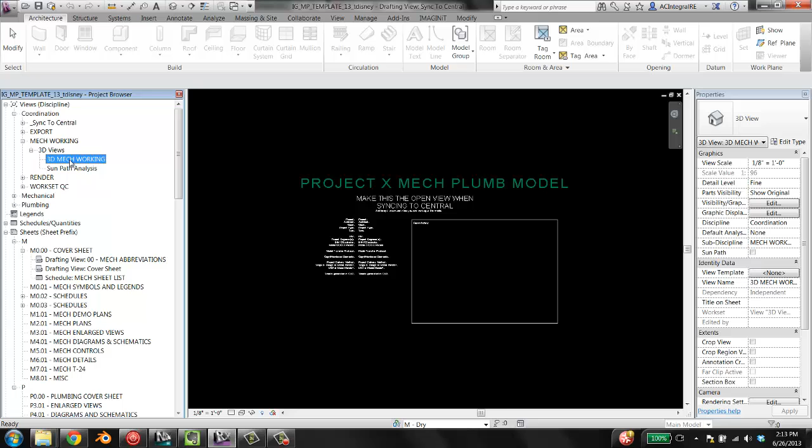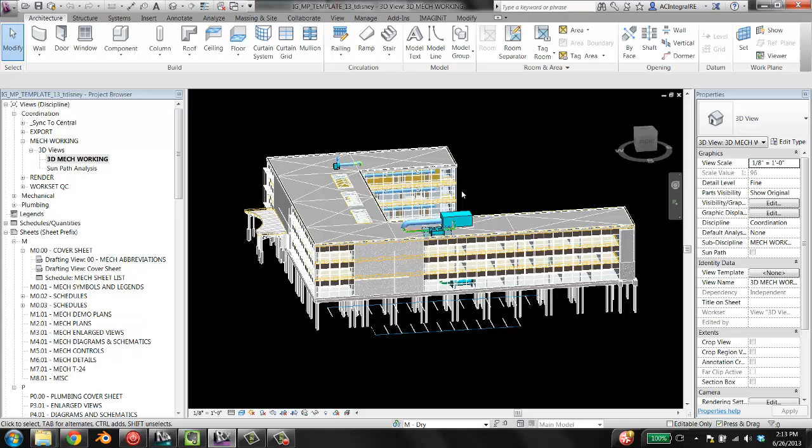Okay, and it shows up on my Sync to Central page. Let's see, what do we want to talk about first? Let's just open up a 3D view so you can see what it looks like. So this is the Autodesk Advanced file that you can download. There's also the structural one. And then there's some actual mechanical modeling in here that I've done just to make sure that all our families are straight, and for some other reasons, kind of rainy day stuff.

So here we are. Again, like I said, these are the existing links. So you're saying, why would I pull in another link? The reason is that when you set up a new project, you're going to have an architectural file, a structural file, a bunch of different files that you're going to want to link into your project. And if all you have is a template file that doesn't have any links already in it, then you are going to have to do a lot of work updating your view templates and the settings for how those display, for your working views, your sheet views, and all sorts of other things.

So what I'm able to do by having this linked in now is go into my view templates for things like sheets. So my mechanical sheet plan has settings for the architectural link.

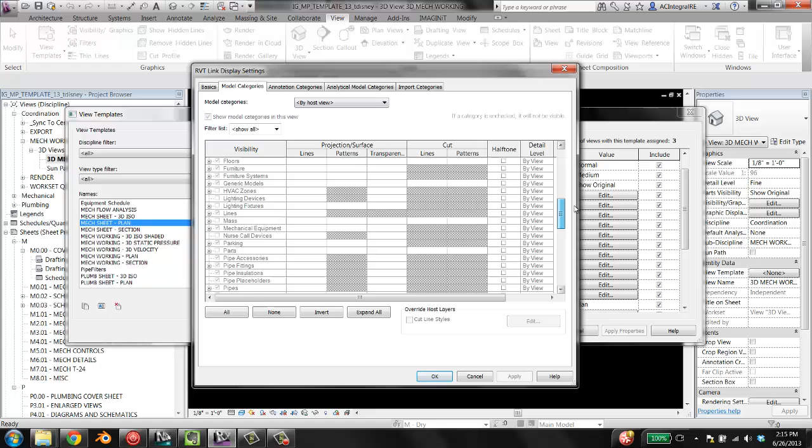Annotation categories are turned off. Model categories, I'm turning off grids, I believe, and some other things. Structural, I'm probably turning off floors. You know, I've got some settings that are specific to the links and the types of links. Architectural links, structural links, electrical links, there are different settings I want to change.

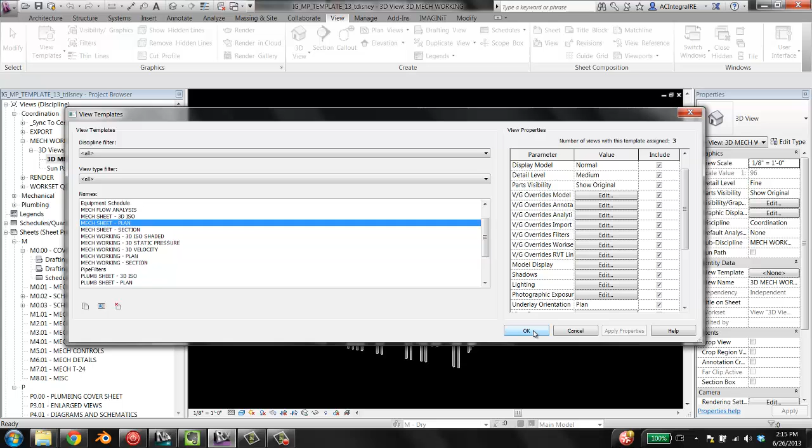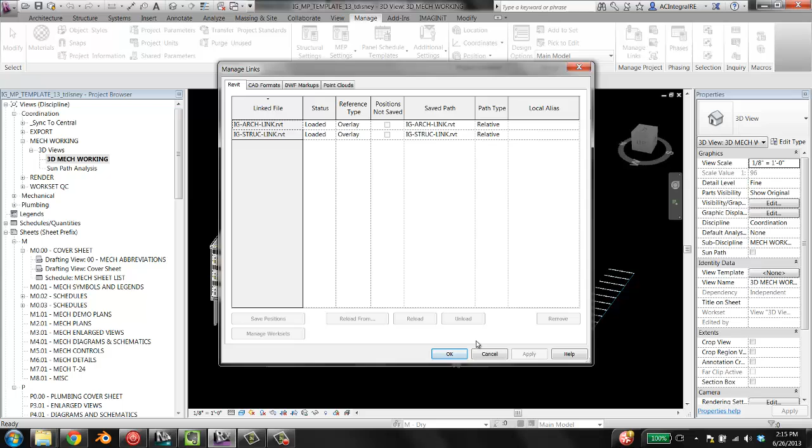And by doing it in a template, you don't have to do it every single time you would create a new project. So when you would set this up, you would go in here, you would go to manage links, you click on architecture link, and you'd say reload from, and you'd go find wherever that actual architectural link is, you'd select it, you'd hit OK, and boom, it would pop up, and all the settings would still apply to the categories in that model. It just really streamlines things.

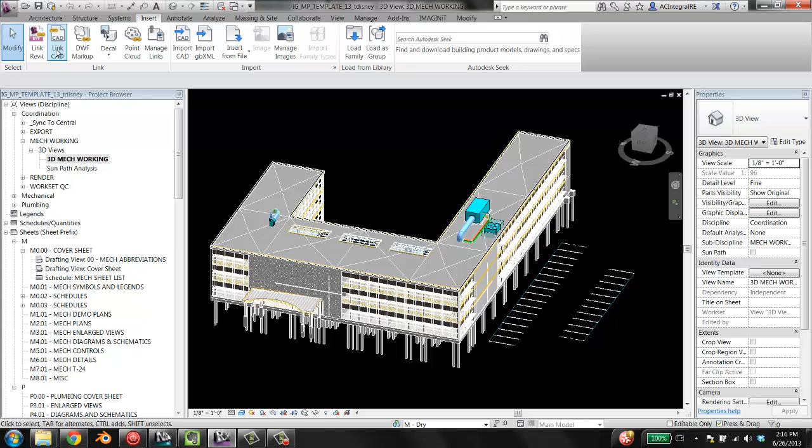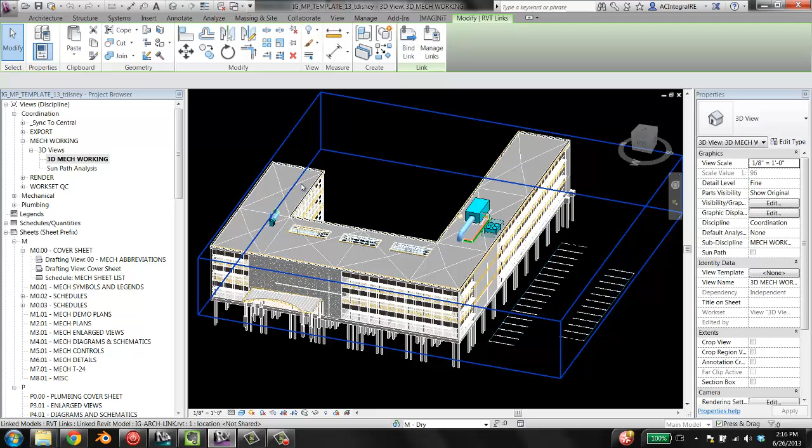The one caveat to that approach is that I've linked these dummy models in origin to origin. So if I were to say link Revit, find this, it says how am I going to position this. The ones that I've already linked in, I've linked origin to origin. And that might not be the way your project is moving. The architect might want you to use by shared coordinates. It's not the end of the world. It just means you kind of have to do it manually, which I'll just talk about briefly here. I don't really want to get into it. Basically, it's these buttons.

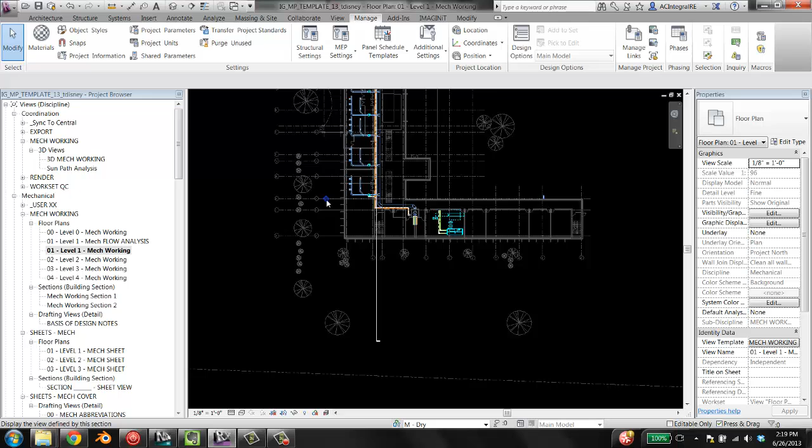The next thing I want to talk about is the existing levels. So let's open up a plan view of level 1. And then I'm going to go into a section view. So I'm going to open this section. And you see what I've got in here. It's got these levels, which are my levels. And then there are these levels, which are the levels from the architectural link.

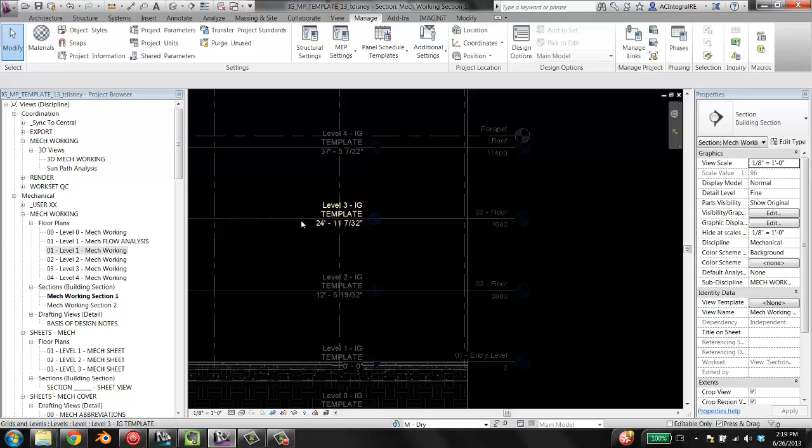So I have not copy monitored these levels. They are free floating, except that they're pinned, which is why it told me that. So if I were to unpin it, I could move this. It's probably going to give me some errors because I have some ductwork and other things that are built off of that. But point is, it's not copy monitored.

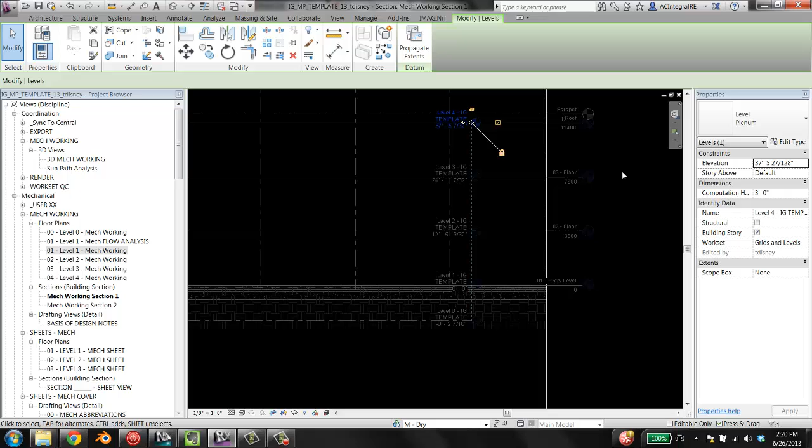And when I get the actual architectural model in here and I look at their levels, what I'm going to do to copy monitor them is I'm not going to have to delete any of these and create new ones and mess up all of my plan views. What I'm going to do is take all of these levels that are already in my template, move them, and align them to the levels that I want to copy monitor from the architect. So let's say this level 2 is here, and then it turns out that the architect's level is actually here. I would move this over to it.

And then I would select all of the levels. And I would say copy monitor, select link, architectural link. Screw that up.

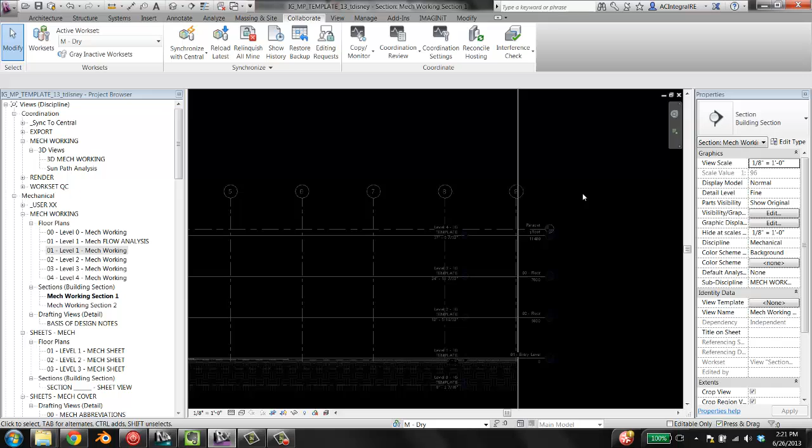That noise is annoying as fuck.

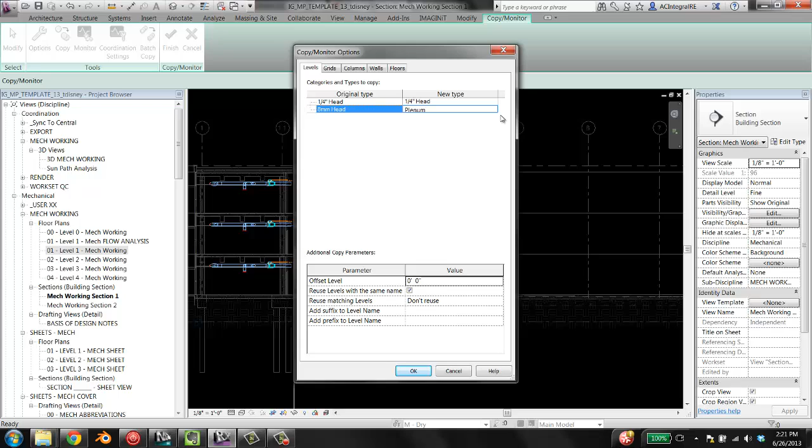Alright, so I've got all the levels selected. I hit collaborate, copy monitor, select link, make sure I click on the architecture. And I go to options for levels. Really quickly I change this to match quarter head. Don't want it to be 8mm head, I'd call that quarter head as well. I would change this parameter right here. It says reuse matching levels. I would say reuse if elements match exactly.

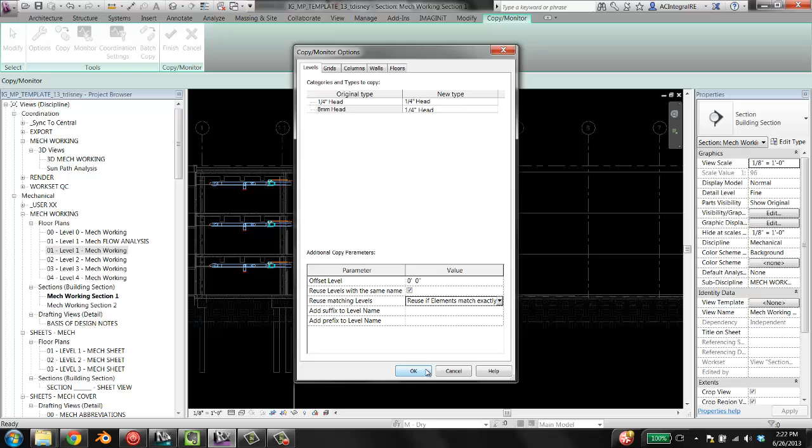You can also do reuse if within offset, because the offset's 0. But I don't screw with that. I just make sure that I align my levels to the ones I want, and I say reuse if elements match exactly, and I hit OK, and then I actually go to copy, check multiple, and I go through and I click on all of the levels in the architectural model that I want to copy.

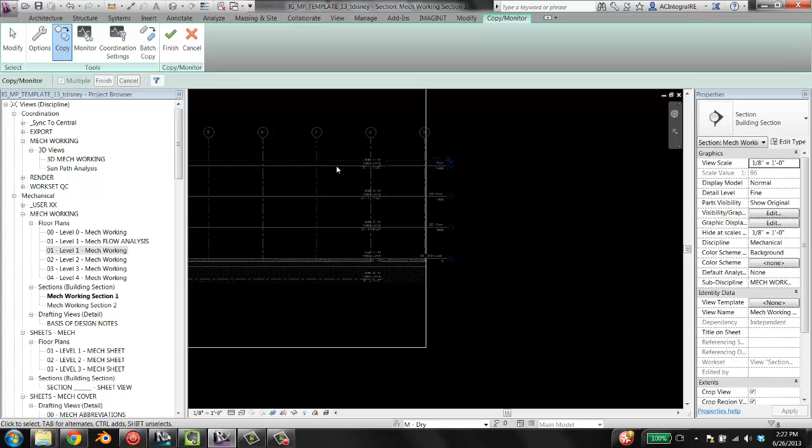So I just box select all the levels, which I selected 5. I don't actually want that one. And I hit finish. And then I hit finish again. And now my levels, my existing levels, are copy monitored to the architect's levels. And all of my views are still set up in the way I want in my project browser. So that's just a quick way of doing that.

You know, and I have plans, another rainy day thing, to create more levels in mine. So I'd have like 3 basement levels, level 0, level 00, level 000, and I'd go up to 6 or 7 or 8 or however many I wanted, so that for any project of any amount of levels, I just set the ones I want and delete the levels I don't have. If it's a 3-story project and I have 6 stories in my template, I just delete 3 of them and I have the levels I need. But I'm all kind of good to go in that aspect.

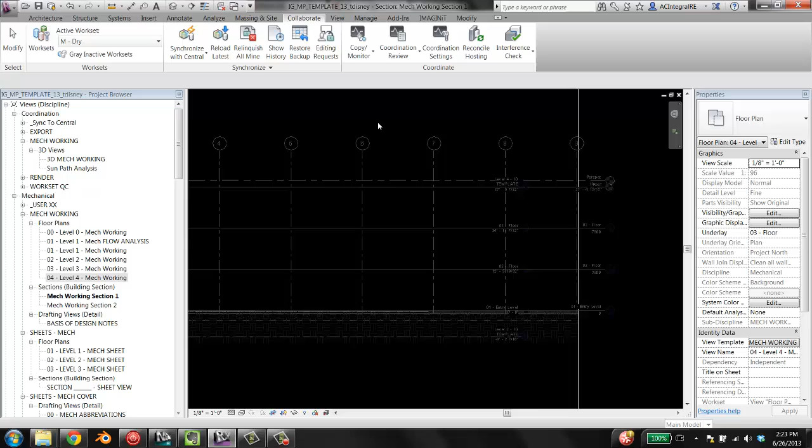And this one I can deal with 5 levels, I believe. So that's how I do levels. Seems to work pretty good. I don't have grids in my template. That's just something you copy monitor from the architects.

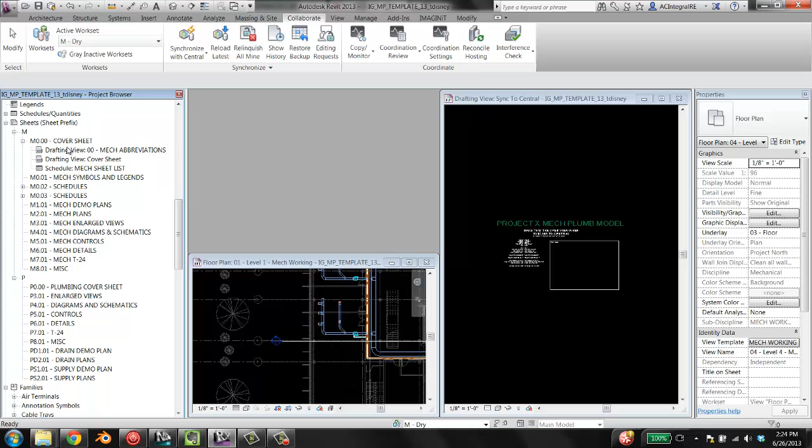It already has sheets set up and ready to go according to our standard sheet numbering convention. So as long as it's a project where your standard sheet naming convention will work, that's good. If it's a more complicated project where you're going to be given some sort of specialized naming convention, then that's not going to work so great. But no harm, no foul if so. But if these will work, it's great because it's already set up.

So I'm going to go to my cover sheet, which still needs some work. And it's just a really basic template that I made. And so typically what you're going to do is you're going to steal the architect's title block out of their Revit model and use it as yours. So you'd open their model, click on their title block, say edit family, save as to your hard drive.

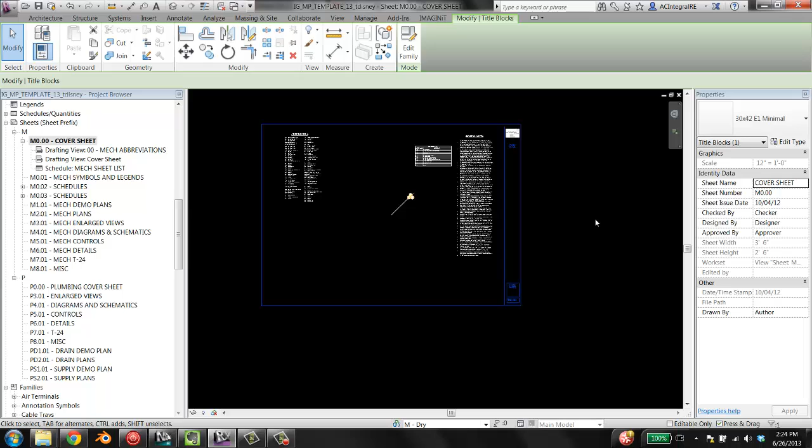And then once their title block is on your hard drive, what you do is you come into your project that you've got set up, go to annotation symbols, and this is the family of this title block right here. What you do is you just right click it, say reload, browse to the architect's title block that you just stole, hit open, and it changes the title block to the correct title blocks for all the sheets that you have set up. So you already have your set ready to go.

You also have all of your views ready to go. Drag and drop, put them in. Boom, within 30 minutes you've got a set ready for review, ready for markups, ready for people to start looking at what in the heck's going on in this project. You don't have to try to open the architect's model and print the sheets that seem relevant to you. You've got it already looking the way you want it to look, so that's pretty nice. So those are the sheets.

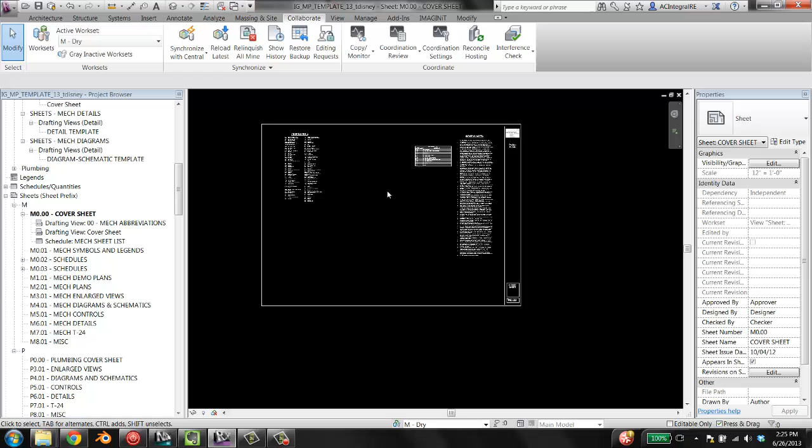I guess I'll talk about the browser organization really quickly. Your browser organization is going to vary based on your company. The way we do it, we have sort of these working views where kind of anyone can go into, and then we also have sub-disciplines for each user. That's each user who's going to be doing significant production or modeling work.

So we change this to say like underscore user Disney would be my sub-discipline, and I would duplicate all the views from here that I wanted and change their sub-discipline to underscore user Disney, and they're in mine, and I can fuss with the visibility settings as much as I want. No one else is going to go in there and touch them. So I can just kind of do what I want, and no one's going to be moving my sections around. No one's going to be messing with my visibility settings.

So I've got sort of my comfortable little workspace. It can be as neat or as messy as I like, and it doesn't have to bother anyone else. And then I also have the views set up that are going to wind up being on sheets. And I have view templates. Locked all those. So I have view templates for sheets. I have view templates for sections, for 3D views, for drafting views, all sorts of things.

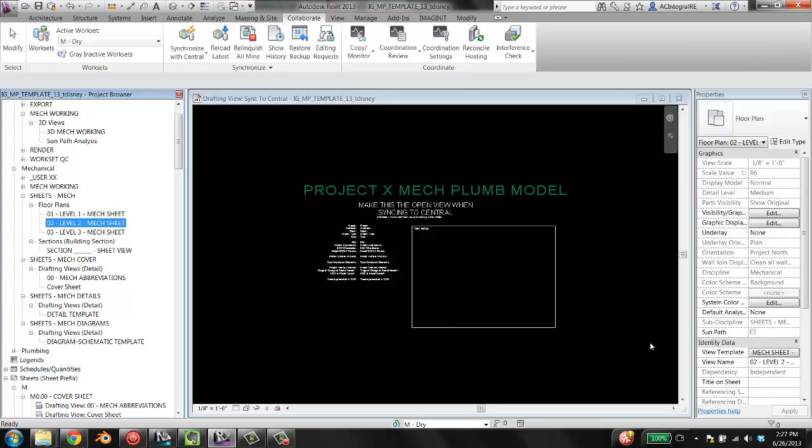So that is a nice segue into view templates. I have all my view templates set up. Go into view tab, view templates, manage view templates. Look at all of them. I've got a couple junk ones in here, but these are the main ones. So I've got view templates for 3D isometrics, plans, sections. I've got a bunch of working ones, which are a little bit fuzzier because they don't wind up on a set actually.

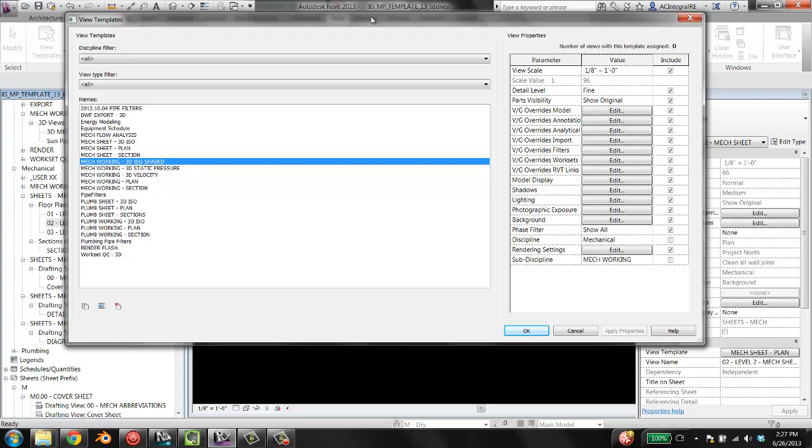Same for plumbing. So these are the ones that just get locked to all of the sheet views so that you don't have this view setting divergence that winds up happening if you don't have sheets locked. You know, when you go into floor 1 and you turn it to wireframe, but all the others are in hidden line, which is what you really want, and then you've got one setting that looks different from the others. So if you have a view template locked to all of your plan views, they're all going to look the same, which is either going to be good or bad.

But if you have it set up in the beginning, at least it's going to be consistent and easy to fix when you do find little visibility issues. You just update the view template, and all of the views with that view template locked to it are going to be updated so that it looks good.

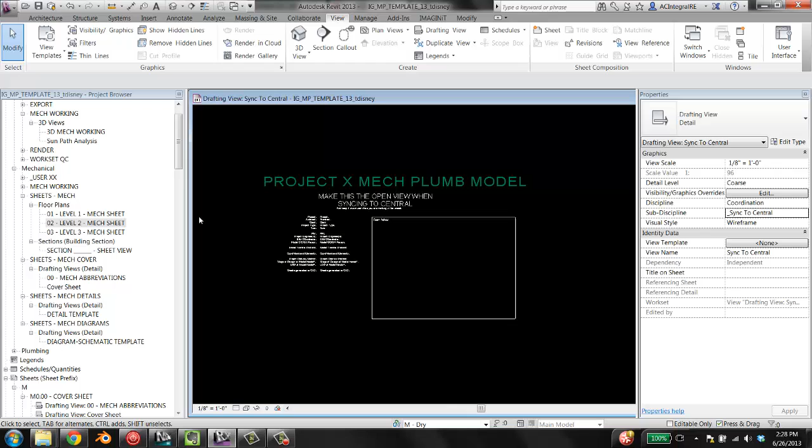Okay. One other real quick thing is the workset QC views. Oh, I didn't even mention the fact that I have all the worksets set up. This is another reason why I have my template as a project, not a template, and as a workshared project. So if you go into worksets, our default worksets are already set up. And the workset QC 3D views are already set up as well.

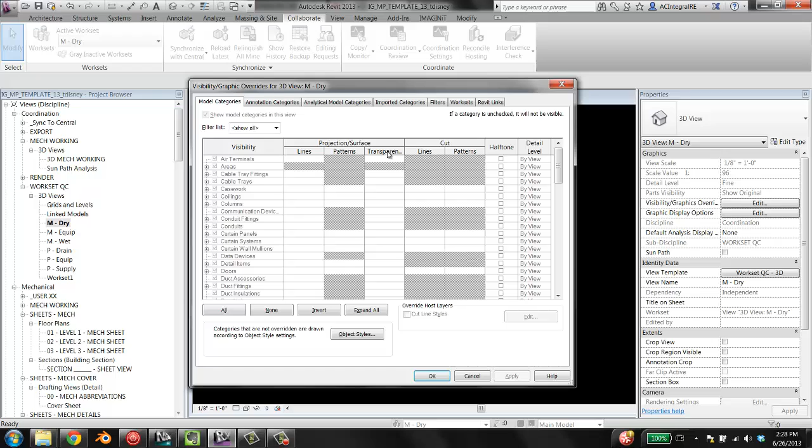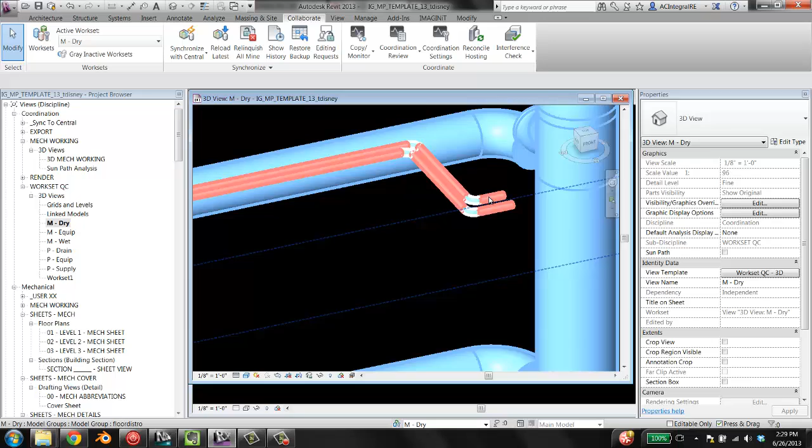So these are views where, in the visibility settings, I have only the named workset visible; all the others are hidden. So I can quickly go through here and figure out if I've got stuff on the right workset. And I can see here that I don't. This is the dry, which is ductwork, air terminals, VAV boxes, things like that. And I've got some pipe, and I've got some big equipment thing down here.

So I can say, aha, and quickly tab select things, change the workset if it was editable, and make sure things are nice there. So that's a really quick way to make sure everything's on its proper workset, which is great for making sure that your project is at a good quality as you do QCs throughout the life of a project.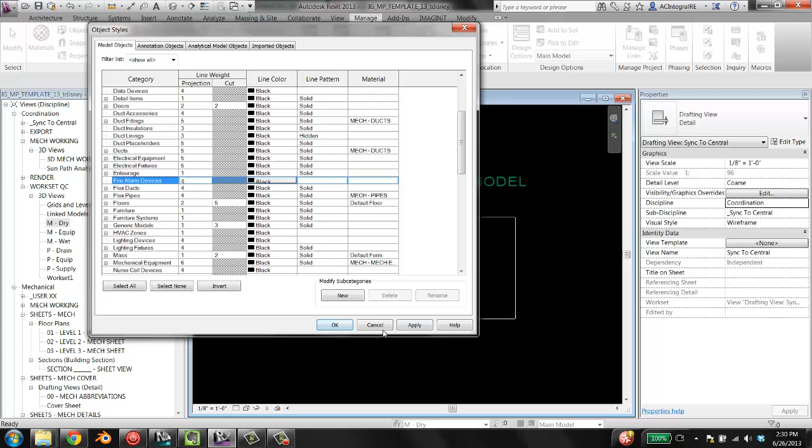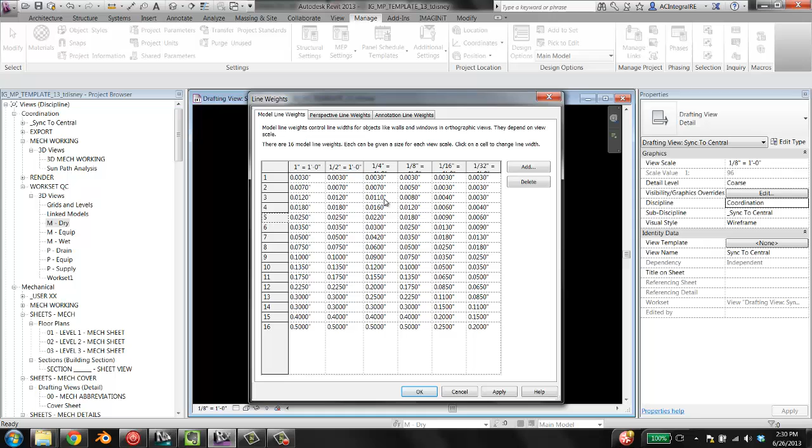And then, you know, my ducts are this line weight, and so you just go through here, make sure these are all okay. Object styles, line weights, which are in here. This is what describes what a 5 is like, so you can make sure you're comfortable with all of these settings and change them if you like. And line types as well, and styles. Got all those set up for your details mostly, which I'll talk about when I talk about details. So we'll get into that now.

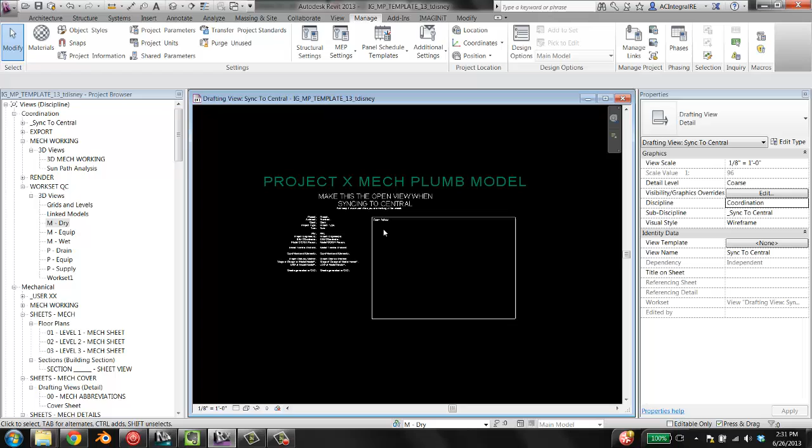So that's pretty much it. So, I think I'll close with a real quick step-by-step of how to get, from the template model, which is stored in a standard location somewhere, the actual project model. So I'm going to close this. I'm not going to save it. So what I would do is I would browse to where my template is. I'm just going to copy it. And I don't have a project folder ready to go, so I'm just going to paste it here onto my desktop, which is not a great idea.

From Revit, I'm going to go open. I'm going to go to the desktop or the project folder. Click on this. Detach from central, because remember it's a central file, but in your Revit standards folder somewhere, which is not what you want. So I'm going to open it, detach it from central, open all of those. I'm going to detach and preserve worksets. Get this error because it couldn't find the reference files. That's fine. First thing I'm going to do is a save as.

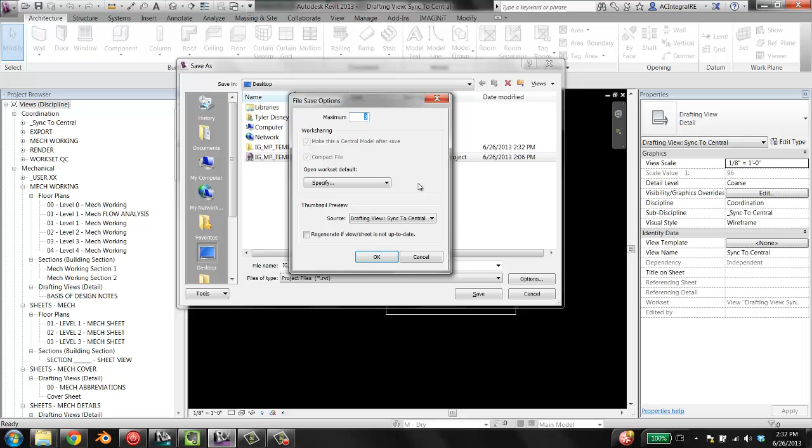We'll just pretend this is where I actually want it. I'm going to rename it IG project awesome.rvt. Going to go into options and make sure that make this a central model after save is checked. Hit OK, save. And so now I am in the new central model for my project in the right place. Of course, I don't actually ever want to be inside of the central model. So I'm going to quickly close it now that I've saved it, and then open it by opening a new local copy of it.

Voila, I have my new project model. The next steps are reload the links to the correct links for this project, copy monitor the levels, and just start cranking. So that's a long-winded introduction to our template.